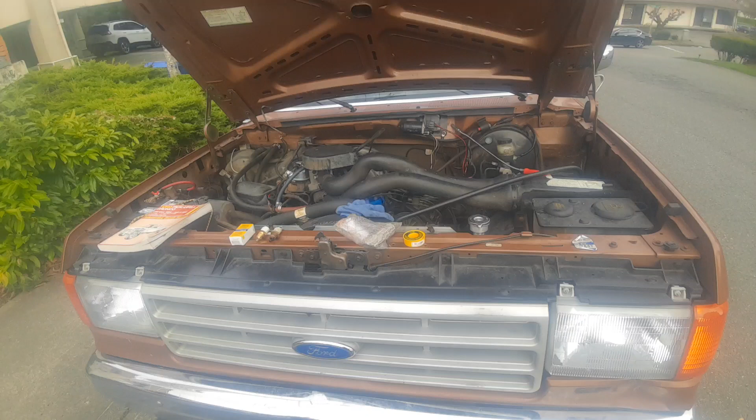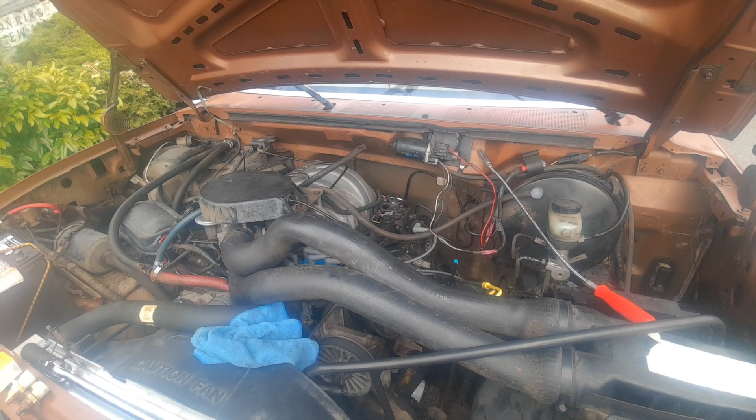So I am learning new things about this 1991 5.0 on a Ford F250 two-wheel drive chassis as the months go, and it's been a little over 11 months, but looks like I discovered another sensor that has not been replaced since factory. It's called the Intake Air Temperature sensor, or as the Haynes puts it, it's sometimes called an air charge temperature sensor, which is what the website highlighted when I was looking for this part. Anyway,

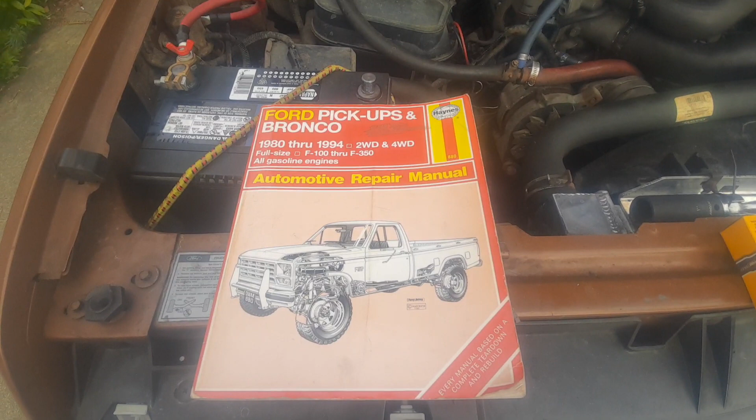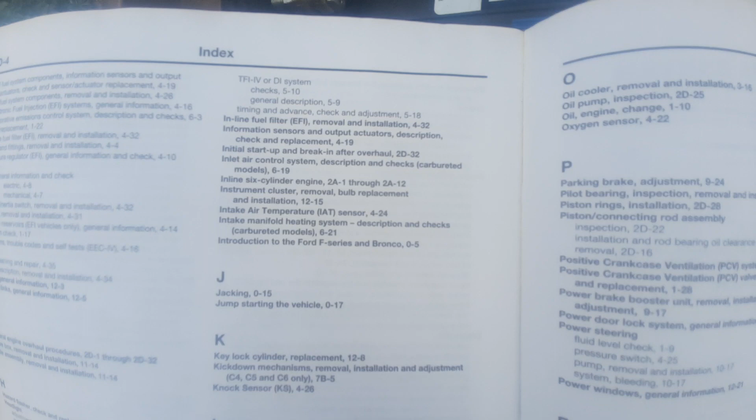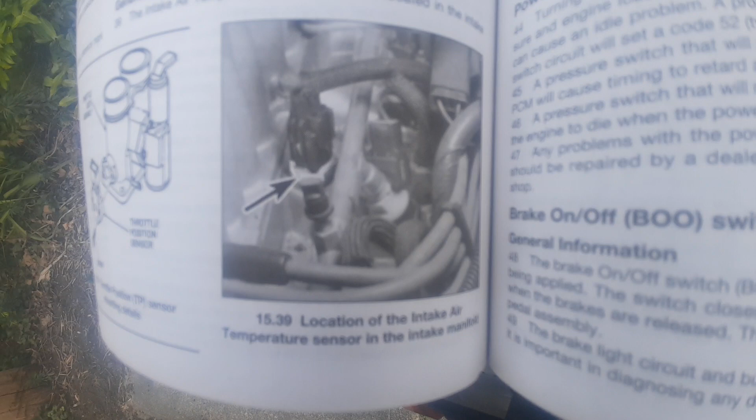here's the manual that I've been using for a while, and if I go back to the index at the very back, forgive the wind and breezes here, right here it says Intake Air Temperature Sensor, 4-24, right up there. So if I turn to this page in this manual, there's a picture on that page that nicely gives the location as to where it's at, which is illustration 15.39, as you can see, if this thing will focus at all. Is it going to? There, that's a little bit better. Anyway,

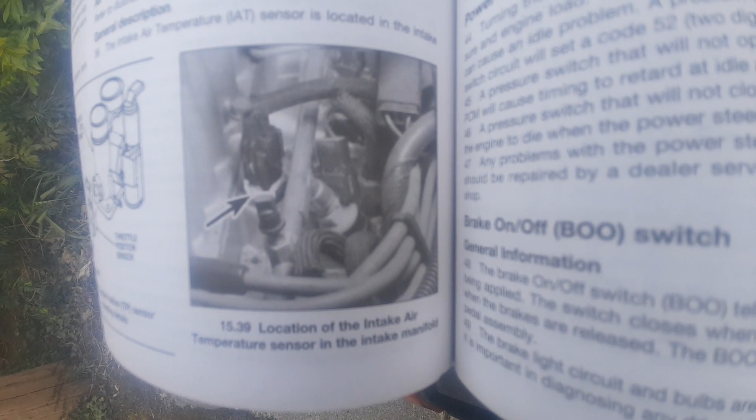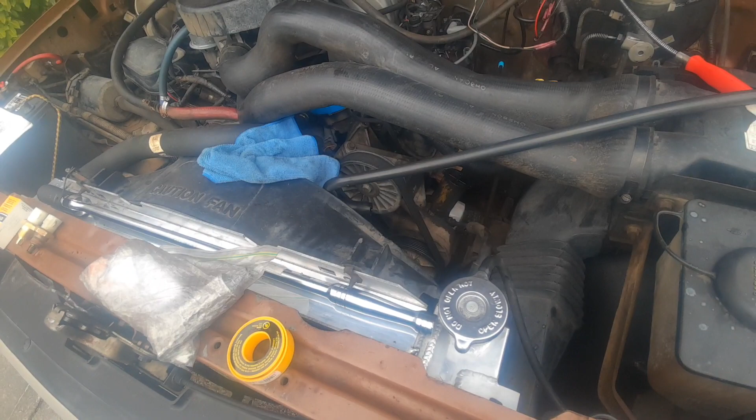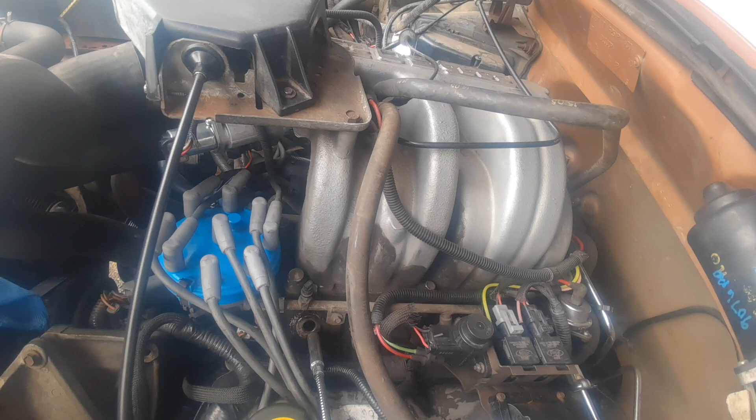it's on the driver's side of the intake plenum. So let me take you over here, and I'm going to point out with a magnet where this is at on the driver's side right here, right near the first fuel injector, between two of them. You see where I'm pointing to? That hole right there is where we're going to be filling back up with a new sensor.

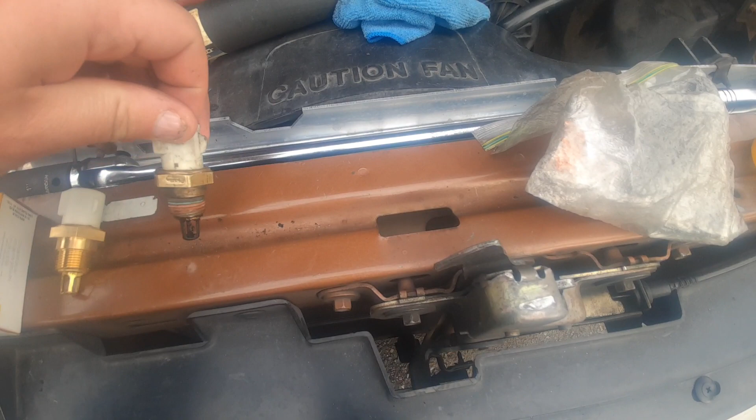So the sensor supposedly helps play the role of how much fuel the truck's computer calculates to send to the combustion chamber based on the temperature of the air. And there's a thermistor at the end of the mechanism. So this is my factory one that I pulled out. A lot of oil caked on this thing. I seem to find a lot of parts in this truck that were original factory that were just never dealt with. Sorry for the rotation. So that's the Ford emblem.

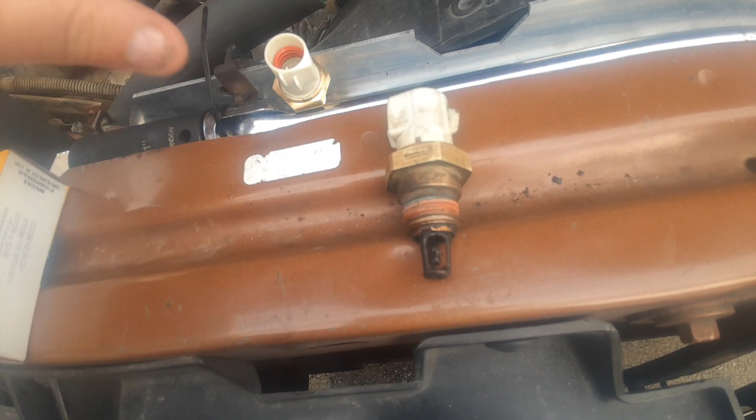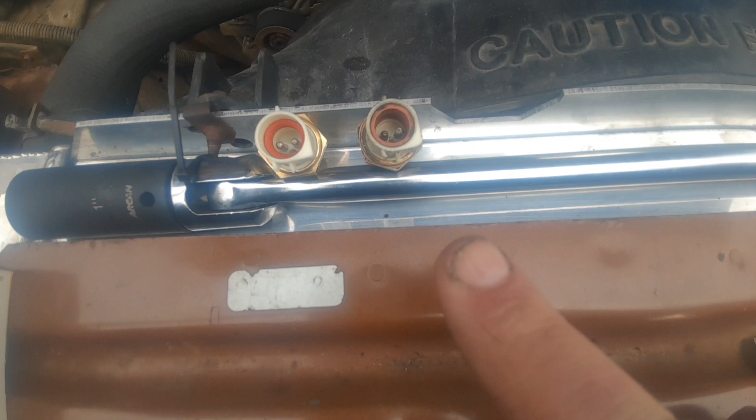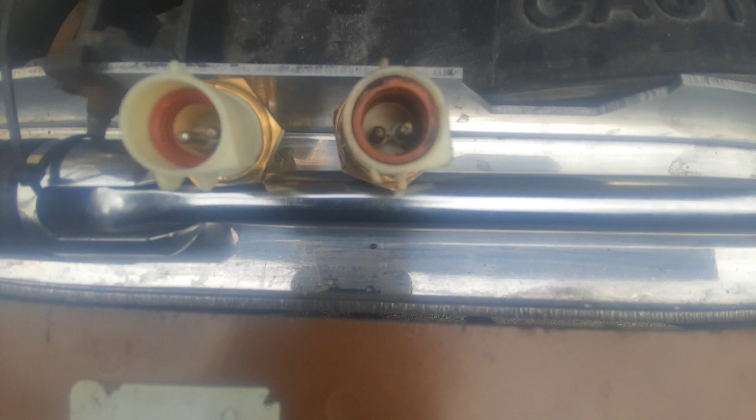Now this is the one here that I found at Napa. A lot cleaner. And let me show you the terminals for a side-by-side comparison. So my factory original is over here on the right. This one's on the left. And as you can see, even the factory grease is still on those terminals on the one on the right. And let me show you the part number right here. What I got off of Napa's website, and they had it in stock.

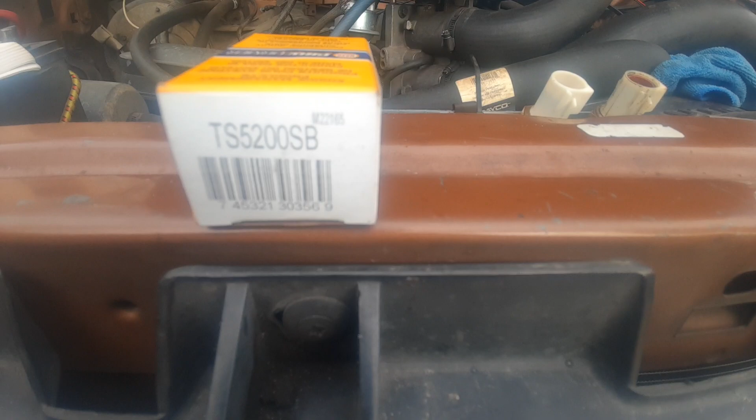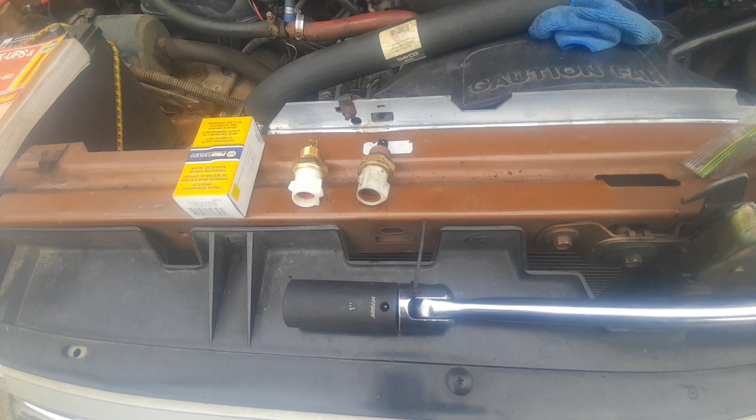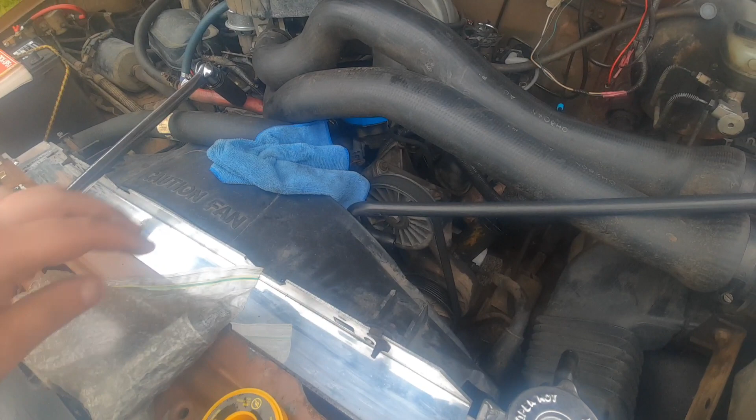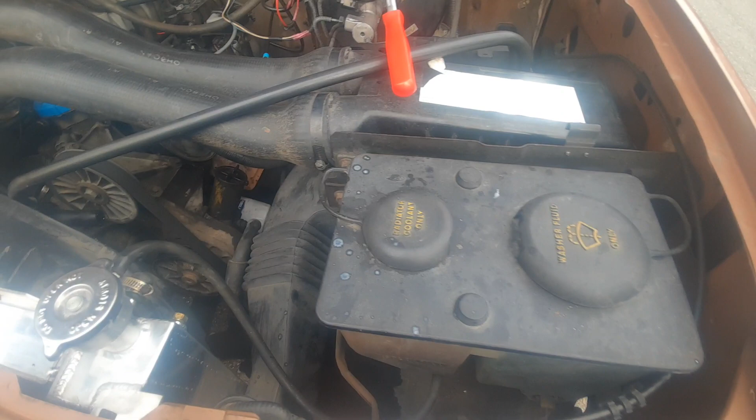So, before I forget to mention it, to remove the sensor, I actually used a 1-inch deep socket to get it, and I did not have to really use a lot of force to get this off. I just liked the breaker bar because of the maneuvering around obstructions, because as you see, the air intake hoses are still there. I didn't bother to take them off to give myself more room, but at any rate, I did move this guy for some more wiggle room back there, which is the one that goes from the air intake box to the engine oil cap.

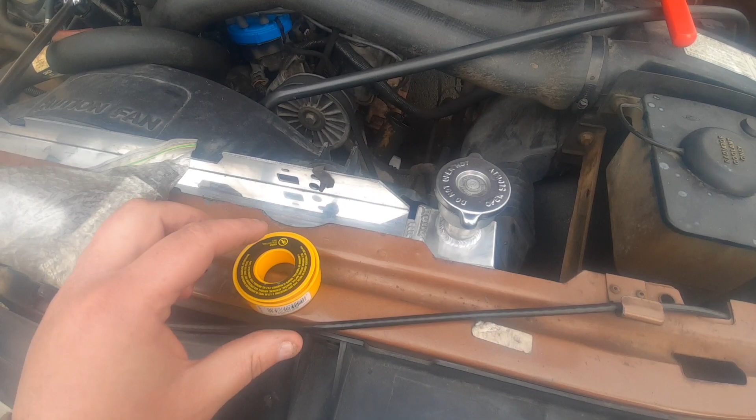So my plan is I'm gonna put some of this yellow tape on the threads of this new sensor before I put it in there, because if I remember correctly, this yellow tape is oil resistant, and provided that my old sensor is caked with oil, like as you see here, I figure it would be best for me to protect the threads. And then on top of that, on these new terminals, I am definitely going to put some dielectric grease to make sure those terminals don't corrode over time.

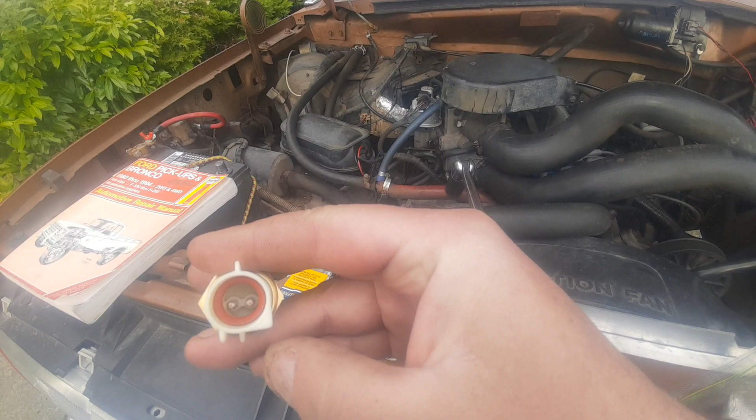And then, before I forget, you see the shape of this with respect to the sharp corner right here? Well, let me show you my harness. Even though both the clips are broken off of it, right here. Let me get in closer. Sorry for the shaking here. See that sharp edge right there? That 90 degree above my thumb right here? Kind of. You might not be able to see it too well here. Right there. Turned over a little bit.

So, I am not very good at shooting these videos, as you can tell, but the other thing I did is clean off a little bit around the outside of that hole, in case there's any oil residue or anything, because we don't want anything going back inside that part of the engine where it's going to detect the air temperature, because that's pretty important. So, at any rate, I just wanted to take a few minutes to show you all that intake air temperature sensor, IAT, or the air charge temperature sensor.